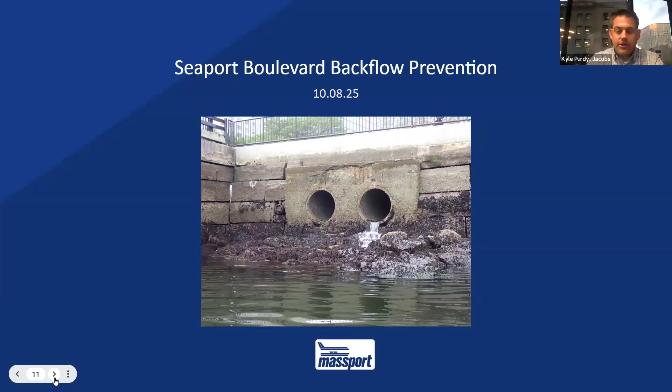So, next slide here. That's our title page there. So we have backflow prevention along Seaport Boulevard. Next slide, please.

The purpose of this project is to install backflow prevention along Seaport Boulevard by upgrading 3 existing stormwater outfalls, and then repairing an existing seawall located on the western portion of our figure. The project will enhance flood resiliency, protect critical infrastructure, and support Boston's long-term climate adaptation goals.

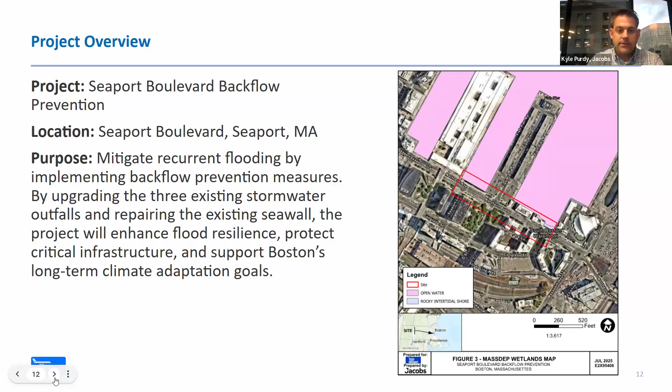As far as construction methodology, location 1 will be installed at low tide. A 2-person crew will lower themselves to the work area by ladder and manually install the backflow prevention at the outfall culverts. The installation will be within 1 tide cycle.

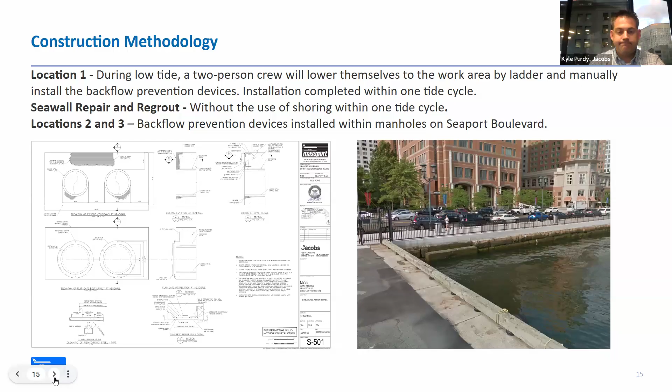Here's our proposed impacts. As Michael mentioned, there's a number of WPA resources within the area. The permanent impact for the entire project will just be the coastal bank associated with repair of the seawall. In order to do so, we will have temporary impacts to land under ocean as well as LSCSF, to install the tide flap as well as the check valves from the manhole.

The flood zone actually comes across the roadway, so here's our temporary impacts within the roadway. And then lastly, you have the 2 100-foot buffer zones. One's associated with the coastal bank, top of the seawall right now. And in the eastern portion of the site, there is a mapped rocky intertidal shore area, so a 100-foot buffer zone extends from that as well.

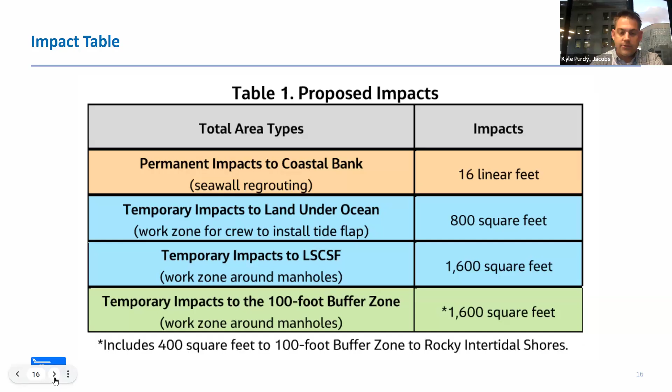Lastly, our project complies with the performance standards of coastal bank, land under ocean, and maintains the interest of LSCSF.

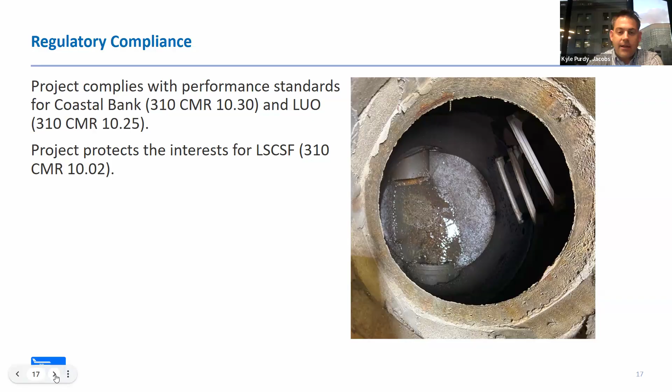This photograph was taken in 2018 during that really high tide event in February, but just shows our work area and how our proposed activities are going to assist in backflow prevention onto the roadway, and build more resilient conditions with the repair of the seawall, as well as these backflow prevention devices. So that's it. I'd be happy to take any other questions you may have.

Great, thank you. So Kyle, that storm in February 2018, is that still considered the storm of record? That's what we based our design off of. Yep. Okay.

One observation here. I was saddened to see that you had to pay the filing fee out of your own personal checking account. I don't know what's going on at Massport, but hopefully parking rates aren't going to be raised to cover our fees. Chris and Chet, we're getting used to this since you put in the NOI that Massport is not subject to local ordinance. I have to say that we don't agree with that interpretation. We think the case law rightly states that Massport is subject to local law as long as those laws do not interfere with the performance of essential government services. Since the ordinance passed, I don't recall any application you brought in front of us where, if you complied—and I will say you generally do comply, if not always comply with the local wetlands ordinance—you just don't recognize that you do need to comply with it. So I've never seen a situation where compliance would have interfered with your performance of essential government services. I'll be repeating that every time I see it in one of the NOI applications.

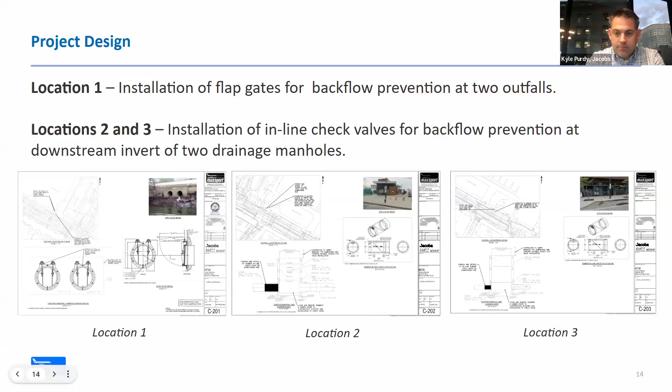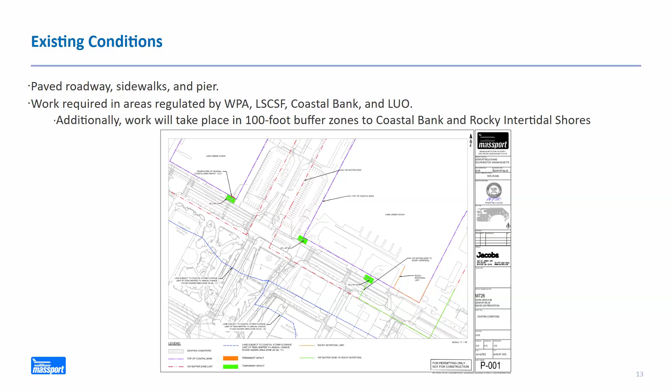So I don't know if it's helpful to scroll back a few slides, to the third slide with our CAD drawing. It shows it goes to the south part of the roadway, and that's where our high point of the stormwater infrastructure is, right there. You can see the dotted red line runs along the roadway. If you go down about half the block to the next block, that's where the end of our catch basin inlets start. Oh, okay, cool, thank you. Alright, no further questions.

Okay, thank you. Commissioner Margiazzi? I guess following up on this, I was trying to figure out from those photos how big an area are you really protecting, and are there areas substantially lower than the rim of the curb essentially there, right at the ocean. Are we protecting against 6 inches of backflow, and anything more than that is overtopping the seawall and flooding?

So that significant event in 2018, that was a substantial storm, right? Our backflow prevention goes right to that. It takes a lot to get over that seawall. Yes, looking at the photo, it seemed like at that storm the elevation of the water on the wet side of the seawall was close to the top of the seawall. I think that's Michael's question, and mine as well.

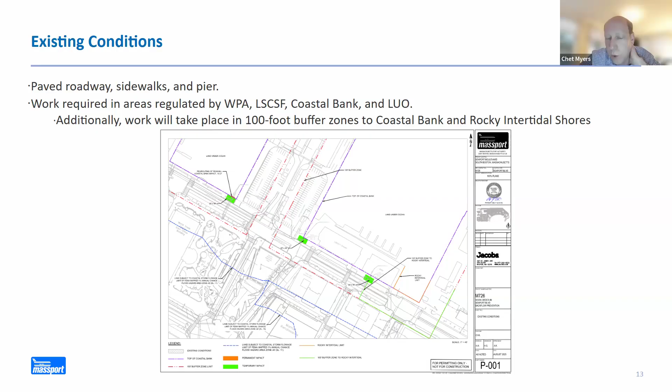I could also speak to that, thank you. This is Chet Myers, deputy director from capital programs associated with this project. It's a very good point. Obviously, this is not the permanent climate change solution for the seaport, and we don't mean to presume it to be. However, it is a temporary solution that does need to get put in place because of the issues we've already shown. It's reasonable to say there's at least a couple to a few feet difference between the lowest catch basins and the edge of the curb in some locations. And it's not just the curb — there's an elevated walkway that runs along the shoreline in that location that might be another 6 inches to a foot higher. Obviously, over the long term, some sort of more permanent solution, similar to the ones City of Boston is considering, will be needed.

We are also looking at them as well. A long-term solution will have to be installed in this location, but that's a much larger project and a much deeper conversation that ultimately we will have to have with the Conservation Commission. But either way, even if we did install that long-term solution, we would still have to put these tide gates on there because the water would be higher than the roadway and it would be coming right up through the manhole. So either way, this has to get done.

Yeah, I guess I recognize the need for them. In fact, my next question will get to that, but it was just trying to figure out - so this is essentially an interim, the first step in a long-term solution, depending on how you want to look at it. Yeah, a step. But yeah, absolutely.

That makes sense. What's Massport's long-term plan for maintenance? Tide gates are wonderful until a rag or a board or something gets stuck in them, and then they're useless. And once something damages the structure, it's useless. So what's your - I presume you can own a lot of these over time.

We actually already do, yeah. We have a number of them we've installed at Conley Terminal, to prevent the same sort of situation that was occurring historically. And we do have an inspection program for those existing ones that are already there. There are some under berth 10, some under berth 11, some that we just installed at berth 17, and some that we installed in the Lobster Cove. These are the first ones that we're installing in this specific location, but we will be adding those to our inspection processes associated with these structures.

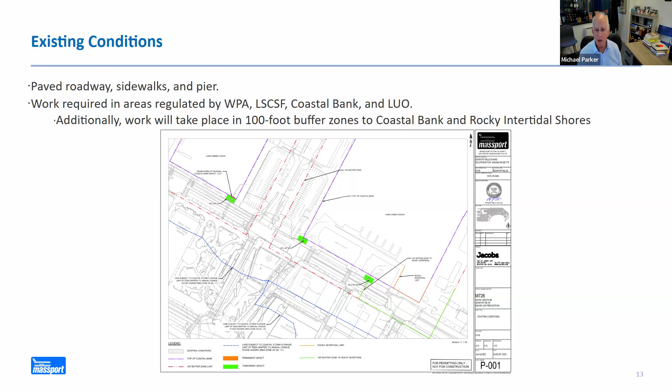Commissioner Herbst? No questions, thank you. Okay. Elena, I don't see any raised hands. I don't see anything either, and apologies, I'm having some camera trouble tonight, but yeah, no raised hands. We didn't have any questions in the inbox either, so we should be set.

Okay, so I will entertain a motion to issue an order of conditions with the condition that Massport will submit their maintenance plan for the tide gates, and close the hearing.

So moved. Do you have a second? Second. Thank you. Commissioner Linay, aye. Commissioner Wilson, aye. Commissioner Estes Margiazzi, aye. Commissioner Herbst, aye. And I vote aye. That carries 5-0. Okay, thank you. Thank you.

Okay, next item on the agenda, notice of intent for DEP file number 006-2074 from McFarland Johnson on behalf of the Massachusetts Port Authority for the proposed construction of 2 temporary modular trailers and installation of associated utilities at Logan International Airport, 17 Lovell Street in East Boston. Land subject to coastal storm flowage is the resource area.

What do we have? Good evening. This is Mary Orlando from Massport's Environmental Compliance Team. Here with me tonight, we have Rob Hogue and Kirsten Weber representing Massport. And from McFarland Johnson, we have Danielle Spicer. She'll be walking us through the slides to explain the project in a little bit more detail. Thank you. Great, thank you, Mary. Good evening, everyone. Danielle Spicer from McFarland Johnson. We can go ahead and jump to the next slide.

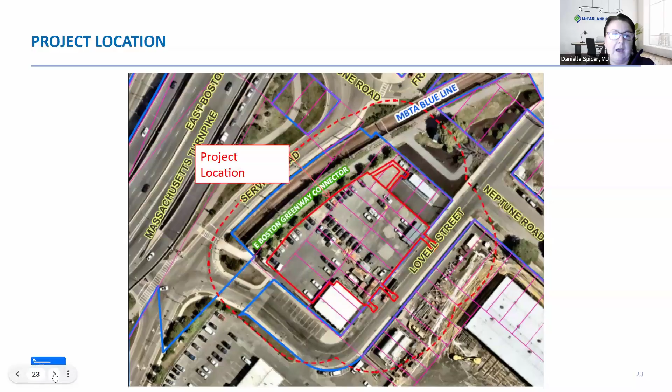As noted, basically the only resource area is that the project is located within the 100-year floodplain, which is considered land subject to coastal storm flowage. So that's what we're here tonight to talk about.

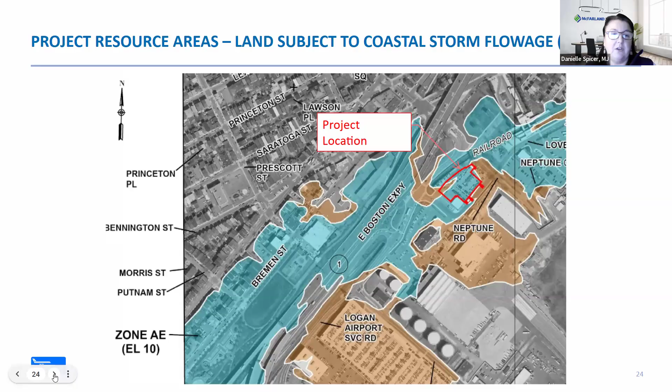This is the proposed layout plan, showing the 2 modular trailers on the site. You can see the majority of the site will remain paved with the 2 trailers. There is a small sliver to the north where we'll actually be able to move a little bit of pavement to crushed stone, so there will be a slight reduction of impervious area throughout the site.

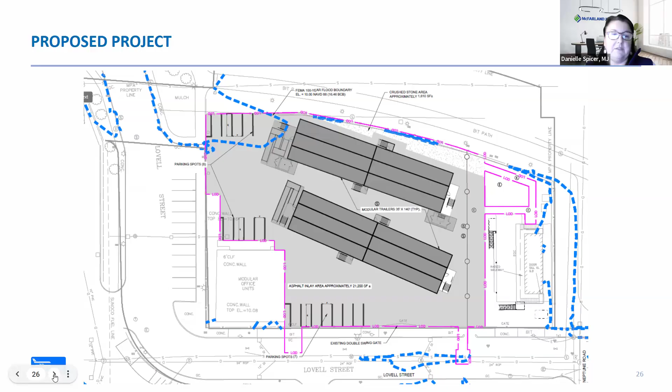This shows the grading. We're actually able to put the trailers onto the existing pavement. I'll talk about the foundations in a second, but basically the grading is not going to change on the site—it will remain flat. The contours shown are half-foot contours, so it looks a little steeper than it actually is, but it's pretty flat throughout. The existing grading will remain, and the storm system on site will remain.

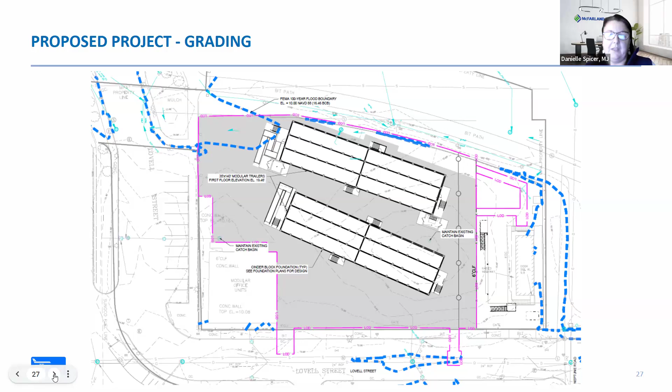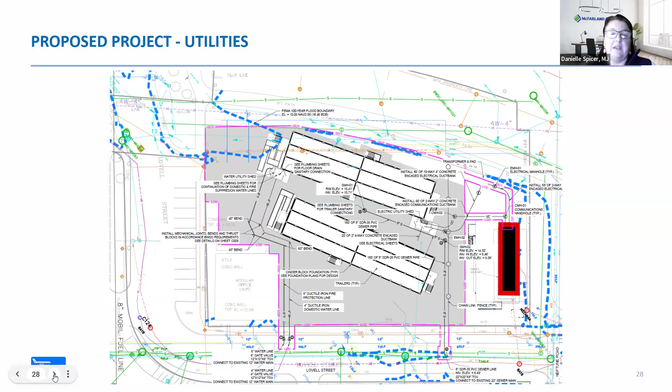This is the proposed utilities. Obviously we need to bring in new utilities for the new trailers, so there'll be new sewer, water, fire protection, and electrical lines. We've filed concurrently with Boston Water and Sewer, so I'll talk more about the utilities and some changes based on comments we received yesterday from them. But first I want to show you a few more slides on the proposed intent of the layout for this project.

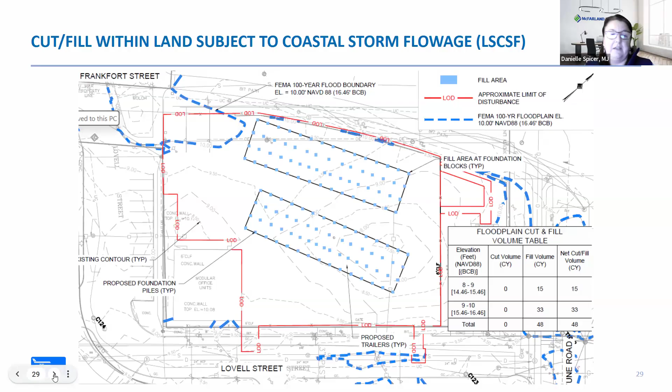The next slide shows an elevation view where you can see it a little better. The existing grade does vary a little bit, so the piles—the concrete blocks—will be staggered, but we'll provide a level area for the trailers to sit upon. You can see the floodplain elevation, shown here at NAVD 88, but at 10, the finished floor elevation will be 13—again, 3 feet above the 100-year floodplain.

Before we jump to the next slide, I wanted to mention we just received comments from Boston Water Sewer, and one of them was pretty significant that we are addressing, resulting in some geometric changes. We thought it was appropriate to show it to the ConCom tonight.

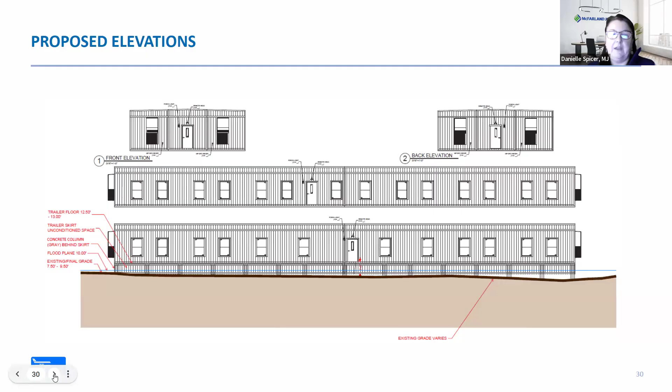What Boston Water Sewer noted was that at the rear of the site, basically to the north, there's an existing easement, and a small corner of the north trailer was hitting it. So they asked us to rotate the trailer so it's completely outside of it. This is a quick sketch showing how the trailers would be located outside the easement. As noted on the side, this will not change the impacts to the fill within the land subject to coastal storm flowage—we're not changing grading, they're still located within the existing pavement, and it's not changing the square footage of the trailers. Really, the updates are geometric in nature and won't affect any previously identified impacts.

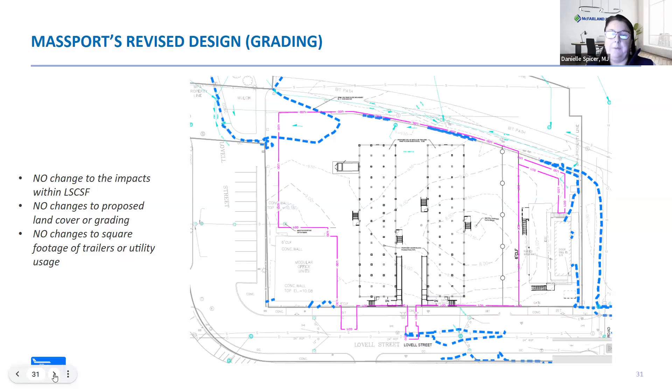And then the last slide just shows how we would revise those utilities accordingly with the relocation and rotating of the trailers. We are working with Boston Water and Sewer on addressing all their comments, and we will be submitting final stamp plans to the Concom once they've been addressed. We just wanted to let the commission know that the final layout would be a little different than what we had previously submitted. With that, I'd like to open up to questions.

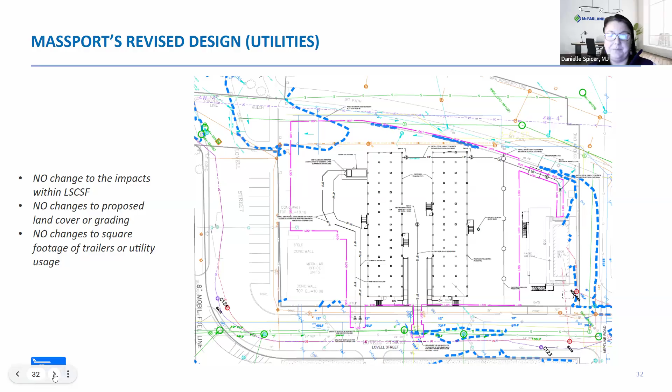Thank you, Danielle, and thank you for getting us the information about the utilities. I know that came up late. So quick question on stormwater management here. Will stormwater treatment improve as a result of this project?

The only improvement really is that small reduction of 1,600 square feet of impervious area. We're not changing the pavement - there's an existing catch basin on site that collects the runoff. It's a pretty small site, and that's going to be maintained, protected, and retained. So the runoff from the site would continue as it is under existing conditions, but there would be a small reduction of impervious area. Really that's the mitigation for the site.

Okay, thank you. And quick question, out of curiosity - is this a new firm for you? I used to be at Green International Affiliates and moved last year to McFarland Johnson.

Okay, congratulations. Thank you. And of course I have to repeat our disagreement with Massport's interpretation of their not being subject to the local wetlands ordinance. I won't go through the whole spiel again, but I want to get that objection or disagreement on the record for us.

Elena, do you have anything on this? No, I don't have anything on this. I think we should be all set. And just to reiterate, I think the existing conditions that we have for the project should cover any changes that need to happen between now and before construction commences.

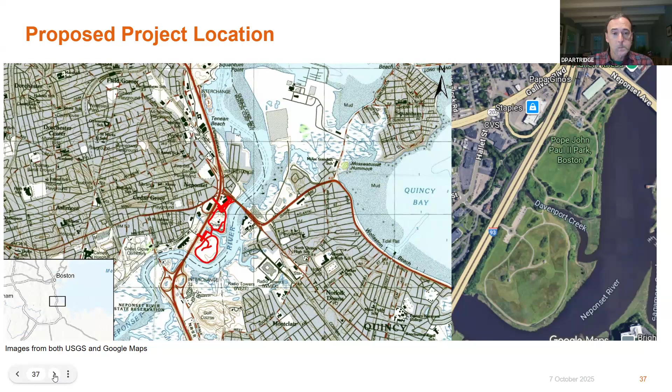The park provides valuable open space and waterfront access to the Neponset River. The proposed project will maintain these roadways, parking areas, and walking paths throughout the park to maintain safe public access to public open space. Importantly for the commission, there are no new impacts or increases to impervious surfaces from the project. The project will occur only within existing footprints and is solely a maintenance project. I know the commission had a question last week during our site visit about schedule - pending a funding source, the earliest construction could begin is likely spring of 2026.

Next slide. Doug, before you go, can I just quickly ask - that image, urban parks, is that a local attribution, our urban wild program, or the attribution for the picture? Oh, it's from a staff member that grabbed it online, so I apologize, we just wanted to make sure we cited it. Okay, I'm just curious who generated that, I didn't know if it was the city or someone else. I believe they grabbed it online, I don't believe it was an Arcadis photo, and that's why we cited it. Okay, fine. Thank you. Next slide.

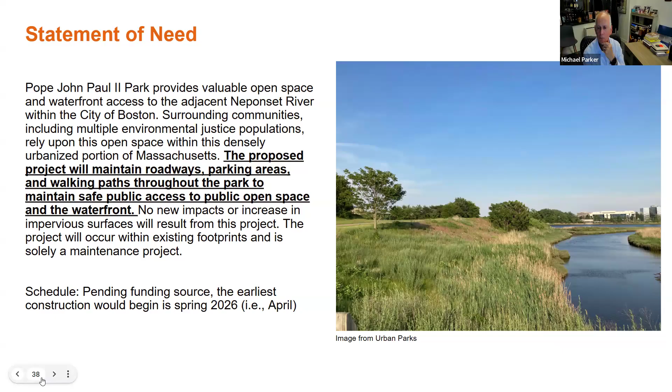I'm going to go through two photos here that outline the site between the north and the south. As we go through, there's a number of slides that are fairly consistent with one another. These next two are to outline and give you a concept, a visual for what these areas look like. You have another aerial with red showing the limits of disturbance. On the right you have a picture of the walking path, as well as one of the access roads into the parking lots. These areas will be repaved. From the road perspective, you can see the granite blocks - it'll be repaved up to the granite blocks. Next slide.

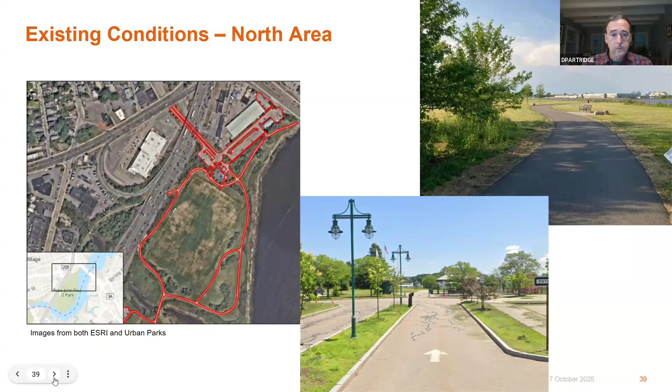Thanks, Elena. Appreciate it. This is the southern portion of the park. Again, another photograph of the main parking lot in this area, as well as the walking trails.

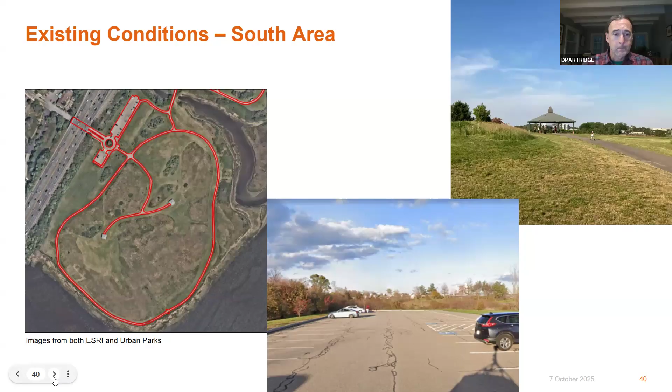There are two additional pieces to highlight. The parking areas have porous pavers that have existed for approximately 25 years, as far as we can tell. These will be dug up and replaced with either porous pavers or porous asphalt. DCR hasn't confirmed exactly what that is, but it will be a porous material to improve stormwater management. It's about 2 feet wide from the granite block, going out 4 feet, so there will be improved porous material within the parking lots. We'll show where those are located in the next slides.

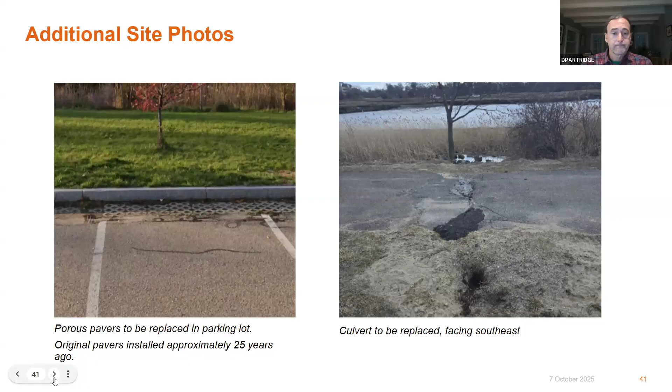Next slide. Now I have a sequence of slides showing the limits of disturbance, the gray areas, and hatching representing significantly overlapping resource areas. The red is land subject to coastal storm flowage, and the yellowish area is overlapping areas including coastal beach buffers, coastal bank buffers, waterfront areas, salt marsh buffers, and riverfront areas. We're within those areas across this sequence of slides, but ultimately within existing features that are already paved and important to the public.

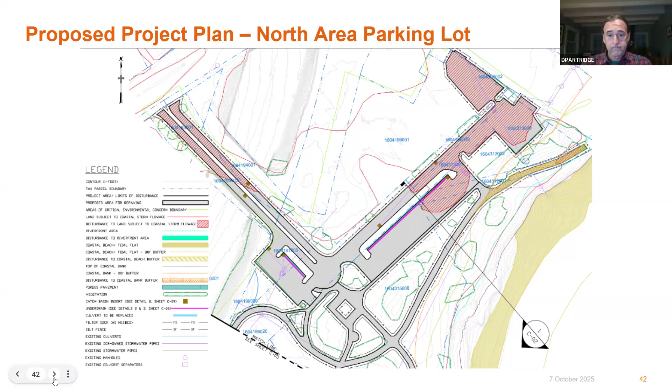Next slide. Again, this is the walking path. You can see we're proximate to the waterfront area, so we're going to have a lot of overlapping resource areas.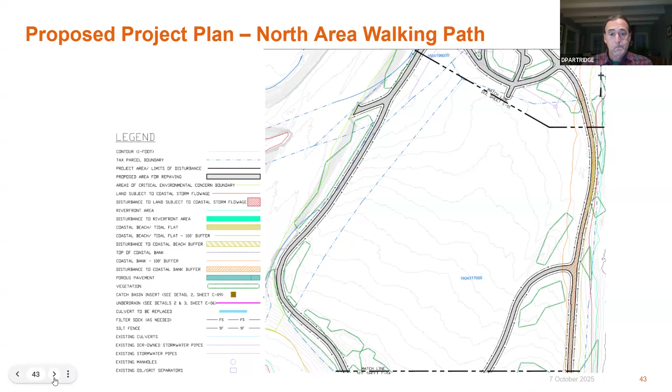This is a cross section from our details relative to the process and construction of the repaving. The existing surface is anticipated to be milled approximately 2 to 3 inches, shown in that orange box. Asphalt paving will then resurface these areas to the existing elevation. One question during the site visit was whether there were areas within these parking lots or roadways where water ponded that could benefit from new drainage or slope changes. To Arcadis or DCR's knowledge, there are no areas that need that improvement, so they're really going back to existing grade.

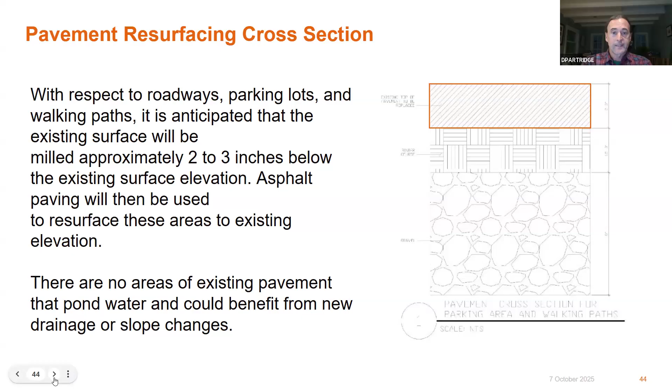Next slide. This goes to the porous pavers and construction of the porous pavement. The pavers will be replaced, requiring an excavation of 2 feet. The demolition will require 2 feet being removed. You'll be constructing an under drain in the lower portion, with a catch basin and clean out valve on the far end, which will drain the entire length of the porous material. In terms of maintenance, it's part of DCR's regular inspection BMP program for the park. We don't anticipate any change to the maintenance plan as a result of this project, since we're just replacing and improving them in kind with a slight expansion.

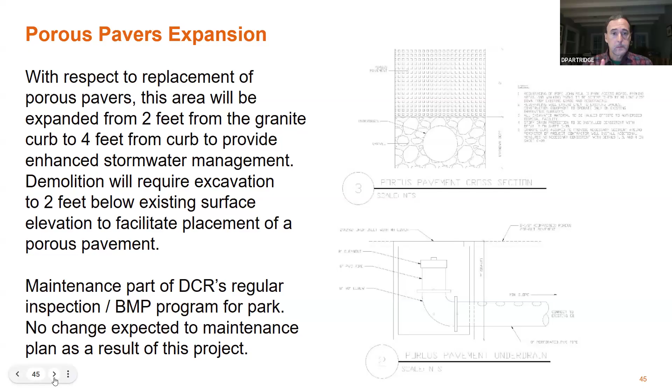Next slide. This goes to the southern parking area, a similar context. Worth pointing out, and I apologize for not mentioning it for the north area, that purple line is the extent of the porous material and the underdrain, so you can see where it's located.

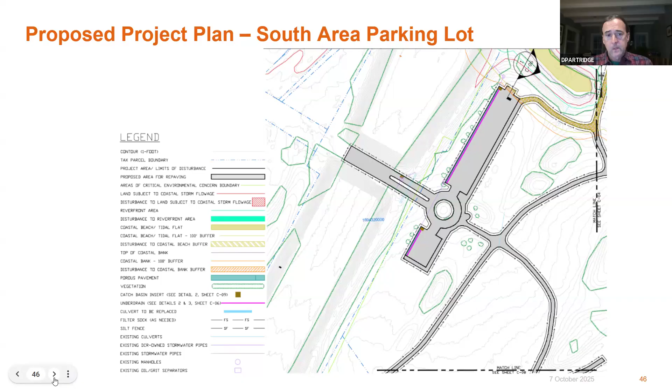Next slide. There are a couple slides here that speak to the walking trail and its proximity to resource areas. Again, very similar: coastal beach buffer, coastal bank buffers, waterfront areas, salt marsh buffers, and riverfront areas. Next slide.

Again, similar—you can see in the very bottom part of this image that culvert area. So you have the repaving, and that culvert is in the lower portion of this detail or drawing.

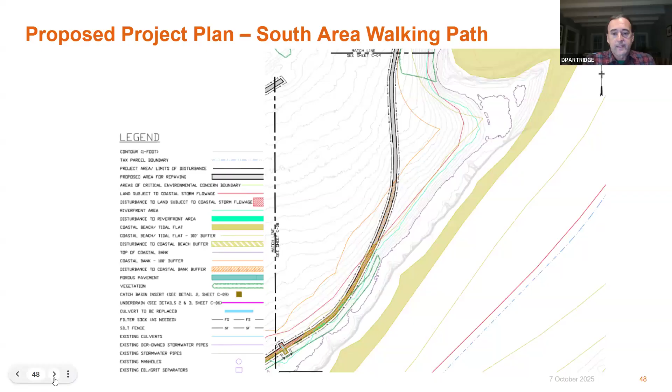Next slide. Culvert replacement—these are the details we provided. A question from the site visit was about contaminated soils, since this was an old landfill. The landfill has a 3-foot clean fill cap with a barrier, so this project's culvert will not go below that capped material. We don't anticipate contaminated soils, and it will be replaced in kind.

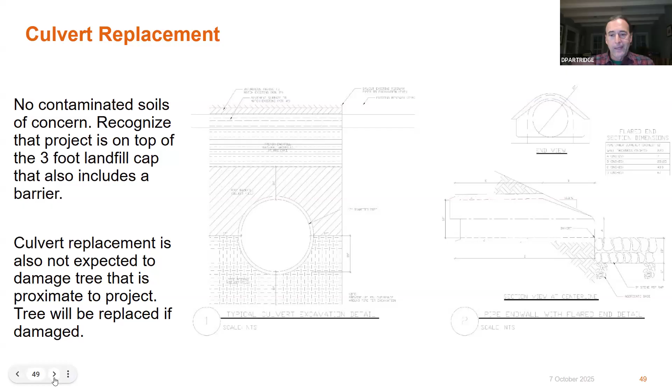And I spoke to the tree—I think, yeah. Next slide.

So we went through all the regulated areas. A couple things of note: the proposed project is not located within either mapped, estimated, or priority habitats for rare species. It is within the ACEC for the Neponset River, which will take us to the next slide.

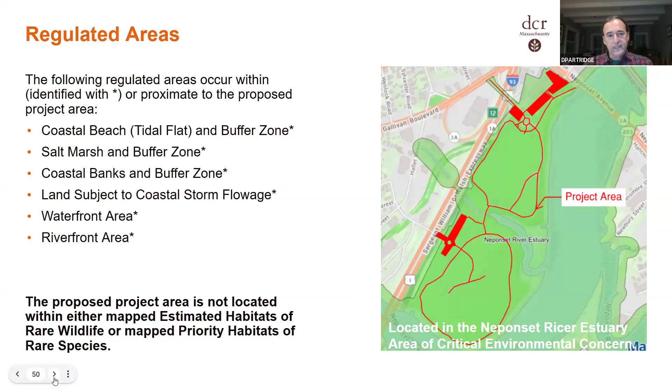We've been working with MEPA through ongoing coordination, and I believe we just received and confirmed via email that this is the case today. Given that this meets the definitions of routine maintenance and/or replacement as defined by MEPA, there are no applicable thresholds for this project, and as such we do not have to file through MEPA, given that it's defined as routine maintenance and replacement. So that was good news on that front.

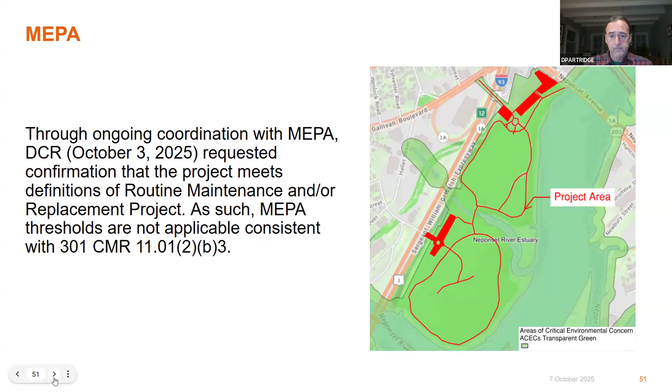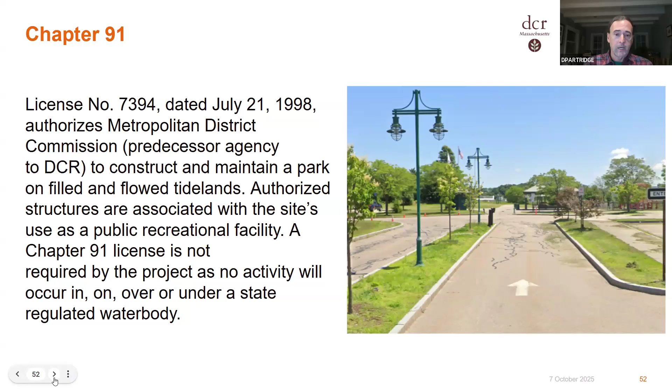Last slide, I believe, which speaks to Chapter 91 and the fact that an existing license does exist from 1998 authorizing the construction and maintenance of these features within flowed tidelands. So a license is not required, but we'll continue to operate under the existing one. With that, I think I can conclude and answer any questions the commission might have.

Okay, great, a couple quick ones. One is, can you just briefly talk about your erosion control measures?

Yes, apologies for not including it. In the end, it's primarily filter socks right around the milling or repaving area. As we saw in some of the roadways, you have basically a granite block providing most of that protection. There will be protection for the existing storm drains as well—that's part of the submittal, so temporary protection for those. For the trails that go directly in and are proximate to the resource areas, we've proposed filter socks, with the option—I believe we included a detail for silt fencing—but in the end those would probably create more disturbance than they're worth for this type of project, given the amount of trenching needed to install them.

Okay, understood—so new pavers are being put in. I understand the old pavers had completely failed. They were, what, a few decades old? Yeah, I think 25 years old is what we found when we looked, so at least a couple decades.

What is the expected useful life? I guess we'd want a few things—whenever pavers like this are installed, we ask for the manufacturer's maintenance program. Maybe this is a good segue before I ask Catherine—I'm not sure, Elena, you may know: do we have a copy of DCR's BMPs and maintenance plan for parks? If not, Catherine, could you direct us to the link or resource so we have it in our files?

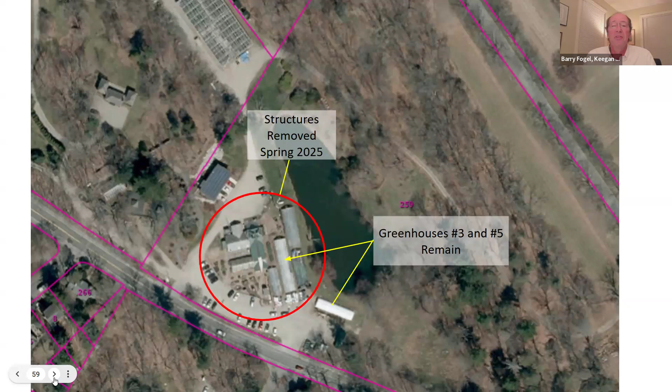When we get to the next slide, you'll see that all of the structures are going to be further from the pond bank. This slide shows you the proposed conditions. So the blue line is the pond bank.

So those are the 2 new buildings, the market barn on the left, the retail greenhouse on the right. There's a viewing deck between the 2 and open space. All of that is outside of the 25-foot waterfront. And only a portion of the parking lot area is in the buffer zones down in the lower right-hand corner. Everything else is outside of buffer zones.

There is a bordering land subject to flooding in the lower right-hand corner, to the right of the parking lot, that we'll speak about in just a second. Next slide, please.

This is a landscape rendering that gives you a sense of the surfacing. So the parking area, there's no formal stormwater management on the site now. A full stormwater management plan has been designed by VHB as part of the civil engineering. All DEP stormwater standards are being met.

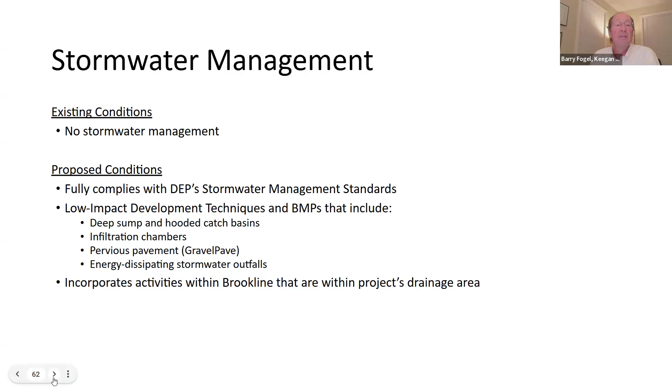Where that new stormwater outfall is at the bottom of that image, it's actually being lowered, and that's the area where the compensatory flood storage is being added. So there's a net increase at both the elevation 185.5 to 186 and 186 to 186.5. So not only is the compensatory volume at the same elevations, but it's increased.

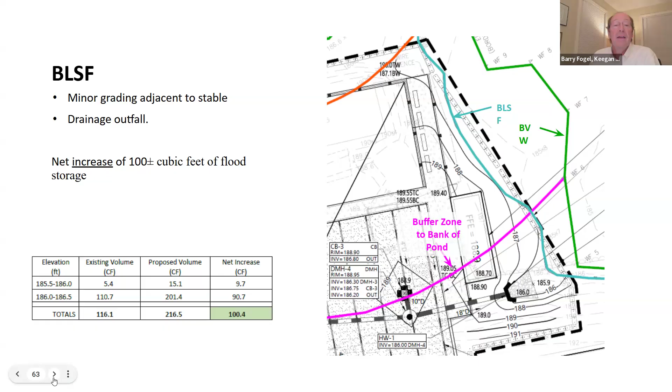The middle image is to the right of the greenhouse. Just inside the curve of the waterfront arc, there's a small section of a low retaining wall that's going to be established to maintain that and create a flat loading and storage area, so the farm operation can have mulch, garden soil, or other materials brought in by truck and moved around by forklift. That retaining wall will have a small guardrail to keep equipment and materials out of the waterfront. The sizing of that area was selected based on vehicle movement evaluations, to make sure there was ample room for forklifts to move around.

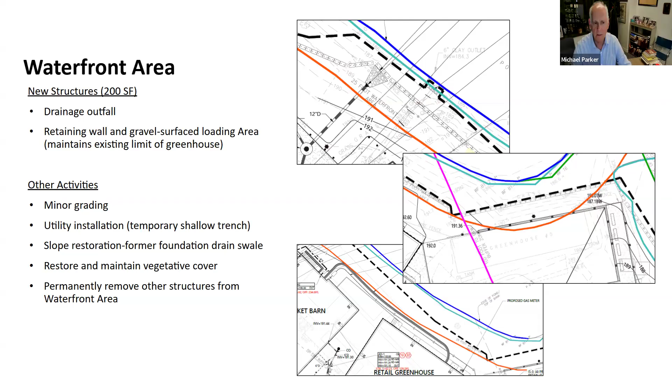And I think that's the last slide I just described, and our last slide is questions. There you go - it's a beautiful looking... wow, much improved. Okay, yeah.

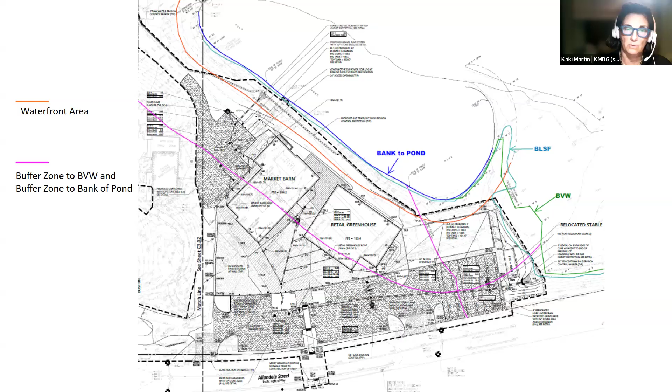But we do need to regrade in there to do the work that Annie's been doing on the stormwater management. And it really is an opportunity to upgrade the vegetation with a more diverse planting of natives and a diversity of native trees.

Elena, can you pull up that landscape image? It might be the next one. That would be helpful - the rendering. Yeah, so you can see that's the area there in green below the stable location. Okay, that shows where that new planting is.

And you know, it's very possible there'll actually be more green circles in that area. As I said, we're working with Bartlett Tree - they've been on site this week, and the data is just coming into us this evening about exactly how many caliper inches will be taken down and what we'll be replacing.

Okay, and looking at that tree planting, and looking above there, between the stable and your limit of work, the area where it doesn't show something - what will be happening there? Well, nothing, we're not changing anything in there. The area from the stable to the limit of work is really staying as is, which is Curtis's space - Curtis the steer's space. I think the aerial is a little misleading because what you're seeing is a thrown shadow there, but that's really just grassy vegetation that Curtis moves out from the stable, toward the wetland.

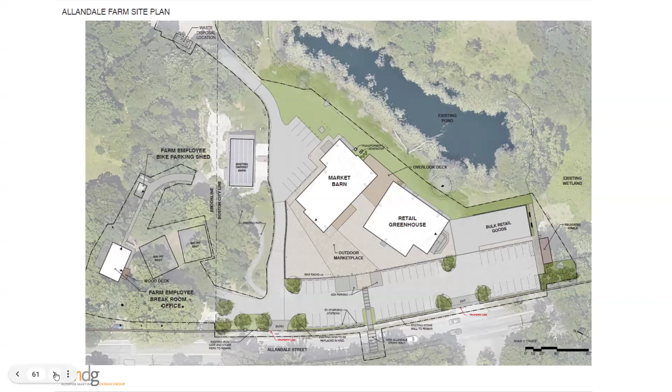So what we can maybe do, Barry, if this is okay with you and the project team, is we could plan to come out for another site visit to look at the erosion controls after they've been installed, especially near the BVW, and conduct that site visit before work begins but after the erosion controls have been installed. Absolutely, not a problem. Sounds fine, makes sense.

Thank you. Elena, I don't see any hands. Did you get any emails? I don't see anything either, and no, we didn't get any emails.

Okay, so with that, I would entertain a motion to issue the order of conditions and close the hearing. So moved. Have a second? Second. Commissioner Linay, aye. Commissioner Wilson, aye. Commissioner Estes Margiazzi, aye. Commissioner Herbst, aye. And I vote aye. That carries 5-0. Okay, thank you and good luck.

Thank you all very much. Okay, next item on the agenda: notice of intent for DEP file number 006-2075 and Boston file number 2025-035 from GEI Consultants on behalf of the National Park Service for the proposed maintenance and repairs of the marine terminal facility at Pier 1 in the Charlestown Navy Yard, 93 Chelsea Street in Charlestown. Resource areas: land under ocean, fish runs, land subject to coastal storm flowage, 25-foot riverfront area, 100-foot buffer to coastal bank. Who's here on behalf of the proponent?

This is Joe Bertherman, permitting specialist with GEI Consultants, and also with me is Kevin Bruchian, project manager with GEI Consultants. Okay, please proceed.

Okay, so this project is for repairs and maintenance at Pier 1 in Charlestown. You can go to the next slide, please. So we just have our topo map here, shows the site in the inner Boston Harbor in Charlestown. Go to the next slide, please.

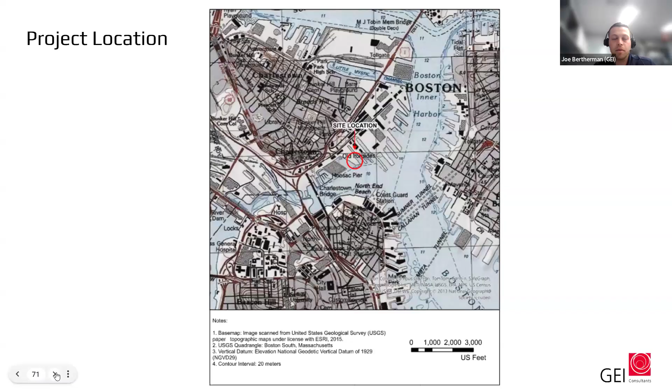The project work will involve temporary impacts over but not within land under the ocean and fish runs, and then within land subject to coastal storm flowage, the 100-foot buffer zone to the coastal bank, and the 25-foot riverfront area. If you go to the next slide, please.

So this shows just a plan view of sinkhole and concrete repairs. Repairs will take place at the top side of the pier deck, the underside of the deck, and the barge attached to the south side of the pier. Topside repairs shown here include sinkhole repairs, resurfacing of bollards, repairs to cracked granite around the bollards, repairs to delaminated concrete, and replacement of safety ladders.

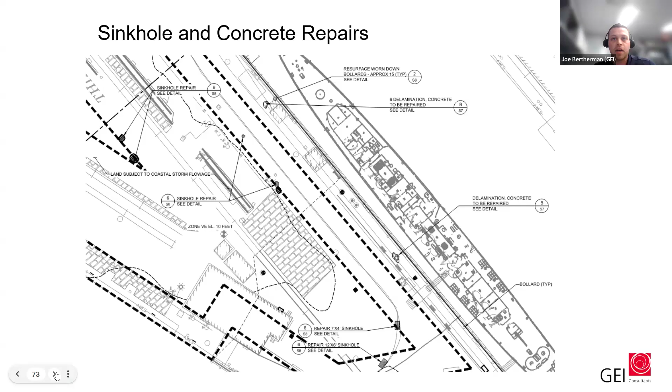So this shows underdeck repairs. Underdeck repairs are going to take place at Vault 7 and Vaults 12 and 13. The underdeck repairs will involve spalling repairs to the identified sections of the concrete encased steel beams. The underdeck repairs don't involve in-water work but will take place likely from a boat or barge where necessary to reach these areas.

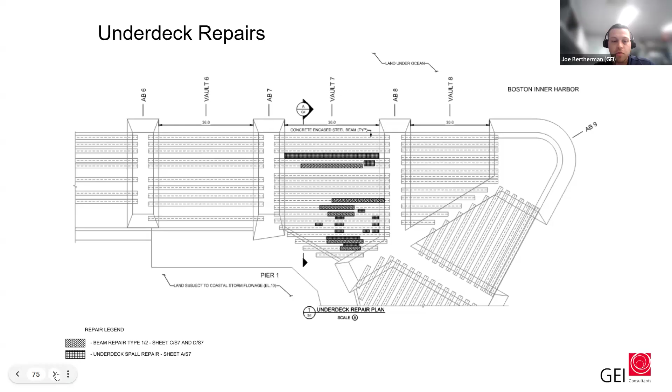And so this slide shows the Vault 7 sections that need to be repaired on the underside of the deck. And if you go to the next slide, this shows our sections of Vaults 12 and 13 where beams need to be repaired.

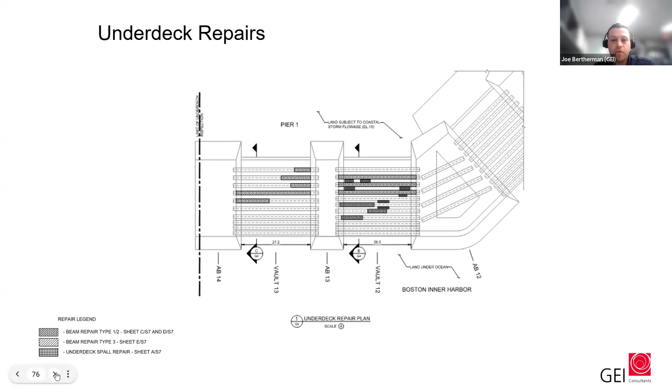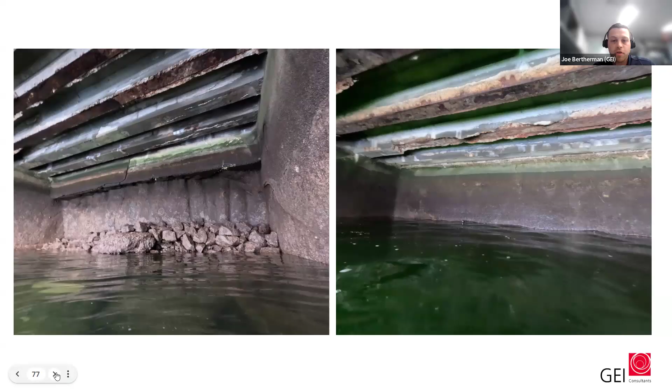And if you go to the next slide, this just shows some of the concrete encased steel beams that are deteriorated on the underside of Vault 7, 12, and 13. This is just typical deterioration that needs to be repaired in those sections. Go to the next slide.

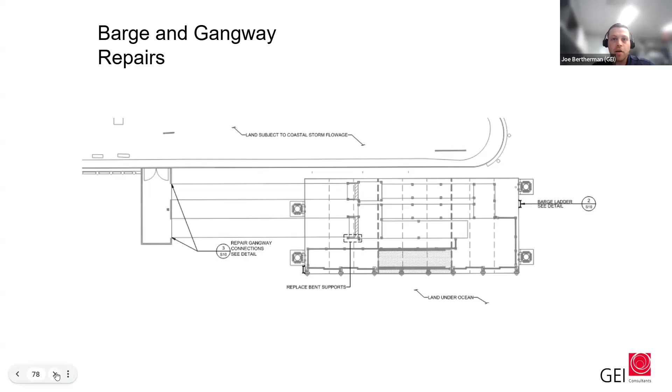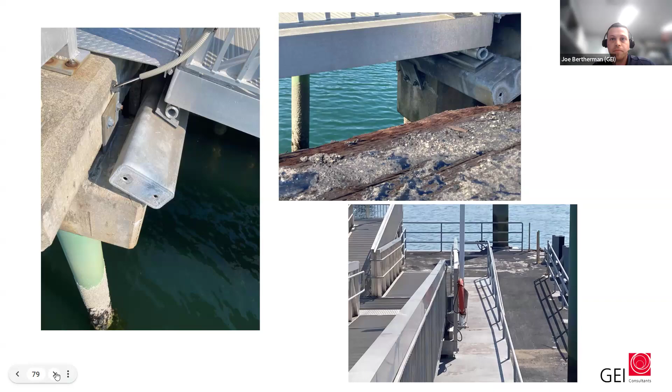Oh, Michael, you're muted. Thank you, I am so sorry.

Joe, thank you. So I assume on the barge, there's a spill management plan. Yes, Kevin can speak to that. Any of the marine contractors coming in to perform the work will, as standard practice, have a spill management kit on hand, whether it be landside or on the floating barge.

Okay, great, thank you, I don't have anything else. Elena? Yes, the only note in the project file for the commission's review is that DMF said they don't have any resource area concerns. Great, thank you. Commissioner Linay? I don't have any questions. Thank you. Commissioner Wilson?

The other question I had was, do you know the cause of the sinkholes? Is that material migrating out, or just natural compression degradation of the fill?

Our best understanding at the moment, Michael, is it's due to a lot of these utilities being abandoned over the years, and some of the structures are not what you'd see with typical construction today, like a concrete vault. This is stacked stone utility structures that are deteriorating over time. The intent for the sinkholes is to fix them by adding stone geotextiles, backfilling the grade, and then repaving, to mitigate this for the future.

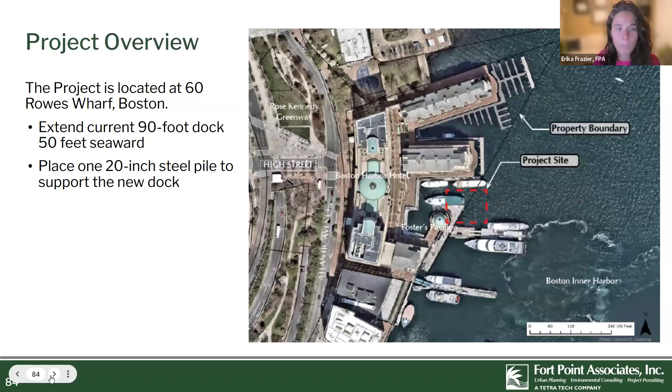As mentioned, the wetland resource areas at the project site are land under ocean and fish run. The proposed 20-inch steel pile would hold approximately a 620 square foot floating dock. There would be 3 total square feet of permanent impact to land under ocean and fish run, and up to 5 square feet of temporary impacts for the placement of a spud barge, which would operate a vibratory hammer in order to place the pile.

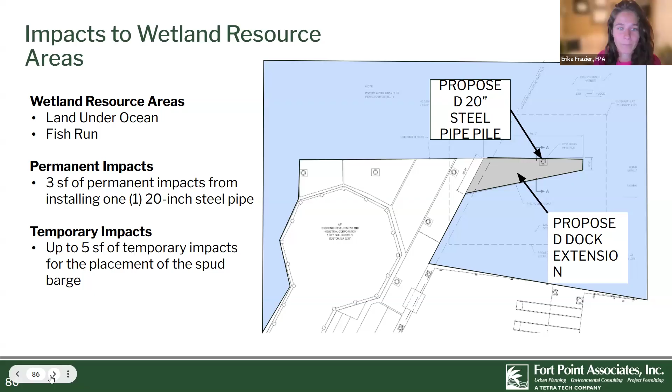For climate change impacts, the pile's top elevation is 20 feet NAVD 88, and it has been designed to accommodate the 100-year flood and future sea level rise. The pile and float can be easily modified with any increases in sea level rise throughout the design life, and the float was designed to resist wave exposure found at Rowes Wharf. The project won't increase any impacts associated with precipitation or temperature increases.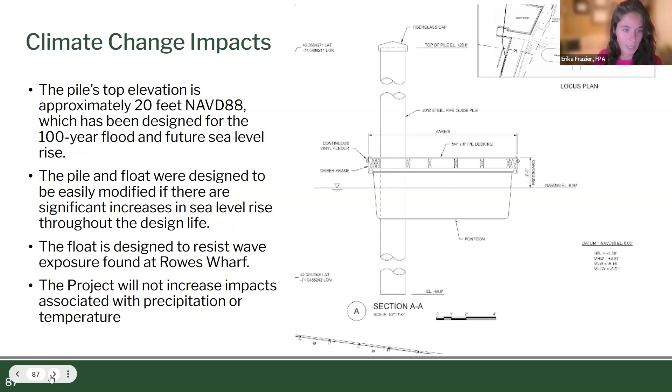A vibratory hammer will be utilized to advance the pile and to minimize impacts to resource areas. We have proposed a silt curtain be installed to contain any turbidity levels during the pile driving activities, and we will be following time of year restrictions. We did hear back from Mass DMF today, and while they didn't comment on the time of year restrictions per se, they applauded the use of the vibratory hammer and asked that we install a silt curtain.

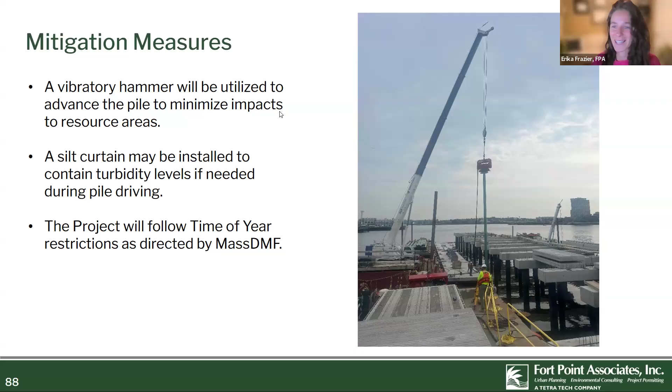Yes, I think that was all we had. Okay, great, thank you. So as far as the vibratory hammer, the way they operate, I think it's standard operation - it's a soft start, typically for about 15 minutes, and then they would be in full effect.

Okay, good, I don't have anything else. Elena? I didn't have anything to add to this either.

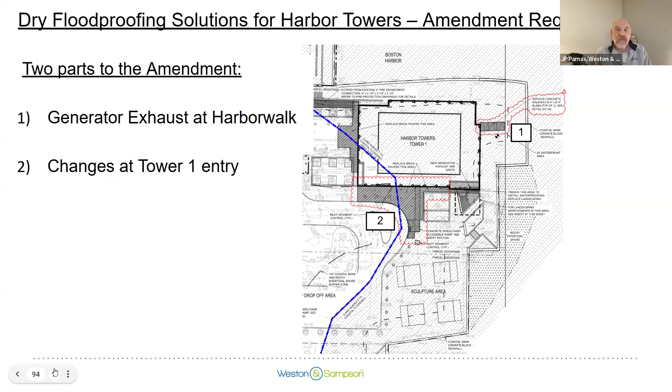The amendment does make revisions to both of these areas, and I will start with the generator exhaust. As commissioners know, there's an existing emergency generator exhaust stack sitting out on the Harbor Walk. The original plan was to replace that adjacent to the existing one with a new stack, which would mean excavating and removing the existing one.

Then excavating adjacent to it to add a new one. In the meantime, working with the contractor and the client, we've determined that there is a route for the exhaust that can go in the basement and out one of the existing areaways within the building footprint. Therefore, we can eliminate the exhaust stack out on the Harbor Walk. So the revision here is to eliminate the new exhaust stack in the Harbor Walk.

Basically the work is limited to excavation and removal of the existing stack, and then replacement of both the existing and new concrete walkway area. Generally, this will actually be slightly less disturbance, related to a complex issue about having to reinforce the existing foundation through which that existing generator exhaust goes. We're also finding a different way to reinforce that from the interior, and therefore we're reducing some of the excavation area adjacent to the building.

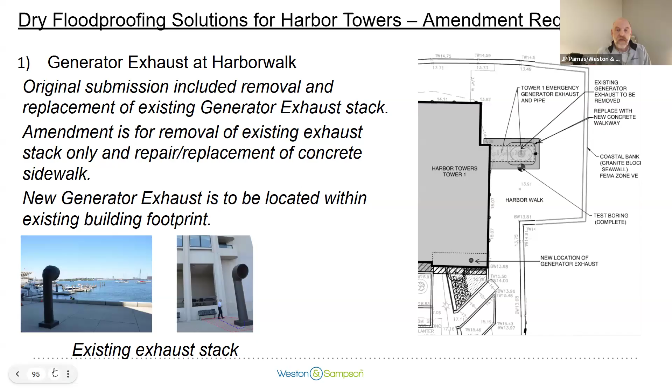The second area is at the entry of Harbor Towers 1. There's a picture of it on the bottom left of the existing condition. As you can see, it's exclusively all impervious area - existing concrete pavers, a concrete wheelchair access from the street up to the building. Beyond that you can see a landscaped area within a small knee wall.

The original proposal took out some of those concrete pavers and removed the wheelchair access ramp, then placed a new wheelchair access ramp a little bit further to the east. Working again with the contractor and some existing grading issues, we've determined that we really need to remove more of those existing concrete pavers and install a sloped walkway up against that far landscaped area, then replace the concrete pavers. The wheelchair ramp will also still get relocated slightly to the east to accommodate from the street.

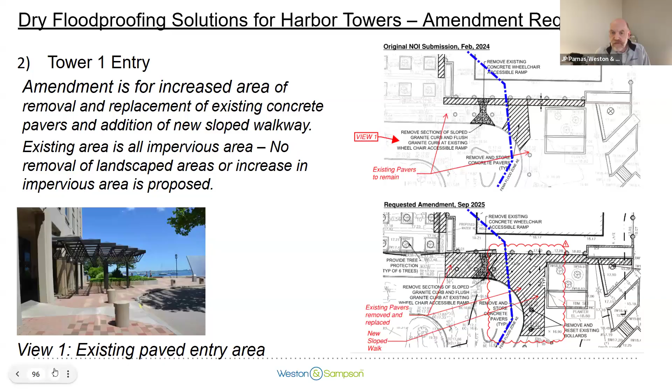So the overall impervious area remains exactly as existing. There's a slight grade change, which was part of the original submission, because of the waterproofing systems - we need to approach the building slightly higher. I think that's mostly it. I don't recall if there's another slide or not. Nope, that's it. Okay, thanks very much.

Elena, what do you have for us on this?

In the staff comments, we've linked the Wetlands Program Policy 85-4 for amended orders, which provides guidance for commissioners on how to determine whether a change to a project is appropriate to process as an amendment. The main questions I wanted to highlight were whether the purpose of the project has changed, whether the scope has increased, whether the project meets relevant performance standards, and whether the potential for adverse impacts to the protected statutory interest will be increased.

The main flag we had, which we discussed briefly with the project team before this hearing, is that DEP has in the past said they would not be comfortable with commissions issuing an amended order of conditions for any work that would increase the total square footage of impacts to a resource area. I agree the purpose of the project is the same. The scope has increased in square footage but seems to cover the same original purpose. I think a portion of the work could very easily be processed as an amendment, and I'd love to know what the commission thinks for the portion of the project that does increase impacts within the 25-foot waterfront area, but specifically LSCSF.

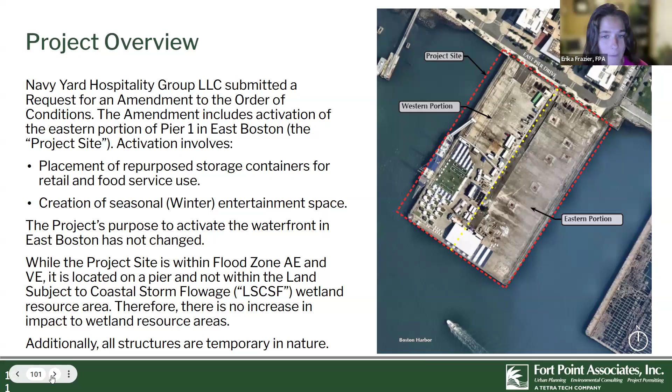So the eastern side of the pier is mostly vacant. The western side of the pier has the tall ship, storage containers for food service, bathrooms, a lawn for gathering, and an event stage, and plenty more amenities for the public.

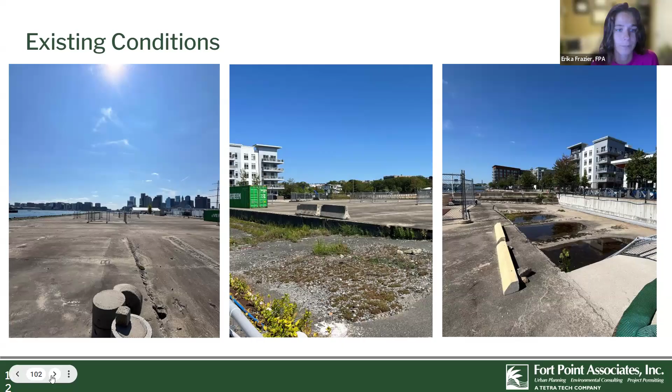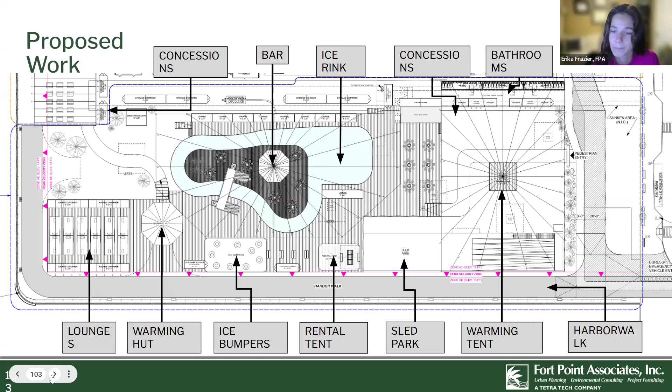Next slide, please. So the operations and maintenance outlined in the original order of conditions is the same as the west side of Pier 1. I've included an image of the silt sock, which was wrapped around the entire pier from the beginning.

The debris sweeping will continue to occur, and the Navy Yard Hospitality Group does regular site cleanups around the area. There is waste collection every 5 to 7 days. There are bathroom cleaning services. We have an implemented spill response protocol. There will be propane tanks associated with the western portion for small fire pits, handled in accordance with the license they have with Massport.

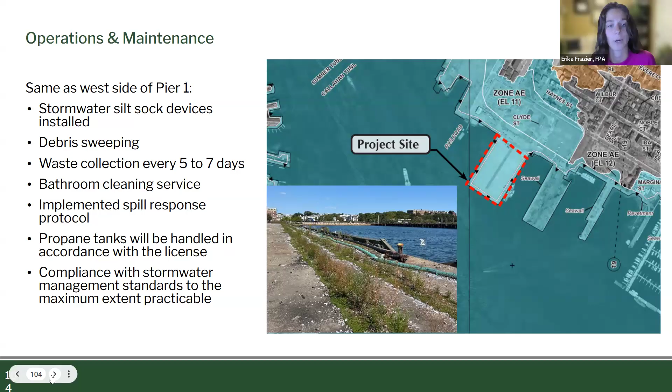Okay, great. Thank you. So a couple quick questions. Elena, it was very helpful to go over the DEP policy document with you today, 85-4, regarding when amendments are appropriate. Looking at this, at first blush I didn't think this would qualify for an amendment, but reading through the policy, given the criteria, I think there are 4 criteria here.

Purpose of the project hasn't changed. Scope of the project hasn't changed. It's waterfront activation, still meeting the performance standards. We have an order of conditions in place that I feel is protective — protective for the first phase of this waterfront activation, and it looks like it's protective for the second phase. I know the silt sock is wrapped around the perimeter of the pier.

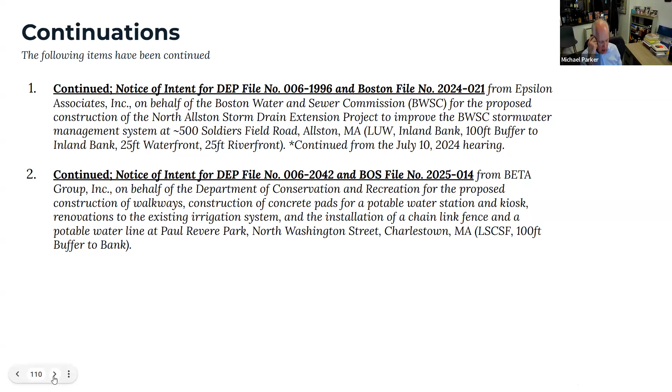First item on the agenda is a request for a certificate of compliance for DEP file number 0061597 from Epsilon Associates on behalf of 135 Morrissey Owner LLC for the renovation and landscaping improvements of the former Boston Globe building located at 135 Morrissey Boulevard in Dorchester. Resource area, land subject to coastal storm flowage.

Okay, so let's go to the next one, which is a request for a certificate of compliance for DEP file number 0061628 from NStar Electric Company, DBA Eversource Energy, for the preliminary site preparation and soil remediation activities associated with the planned construction of substation 131 located on Lot 2, Condor Street in East Boston. Resource area is 100-foot buffer to coastal bank and designated port area. What do we have there?

Yes, so we conducted a site visit on September 11th, 2025. Everything appeared to have been done in accordance with the permit that was issued, and we would recommend issuing a certificate of compliance with perpetual maintenance conditions numbers 27, 33, 45, 46, 51, and 63.

Okay, thank you. Any questions from any commissioners? Yes, my only question is, okay, it's for site prep, so it seems far from being completed in terms of construction, but definitely this is not. Yeah. Okay.